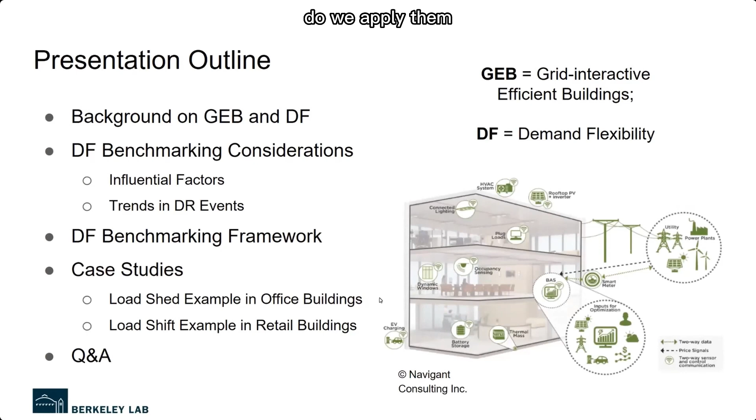So what I'm going to talk about today is to give you a background on grid interactive efficient buildings and demand flexibility in general. And then I'm going to show you this important benchmarking framework that we came up with. But also, as importantly, I want to share some of the thinking behind it, how we came up with this framework, why it looks the way it is, and then talk through a couple of very significant case studies with a large number of buildings. How do we apply them to answer research questions?

So buildings are getting increasingly smarter these days. They're no longer just the enclosure for human activities that consume energy to provide comfort. Certainly, we ask more of the buildings; these are the traits of modern grid interactive efficient buildings. We've been working on efficiency for decades by now, and they're connected with a lot of devices within the buildings, the office equipment or consumer electronics. And if we're not careful, these devices can consume a lot of energy. So energy consumption in buildings could be on the rise if we're not managing carefully.

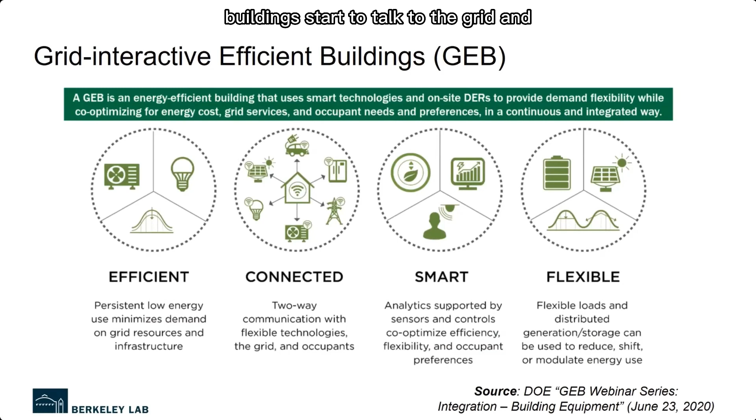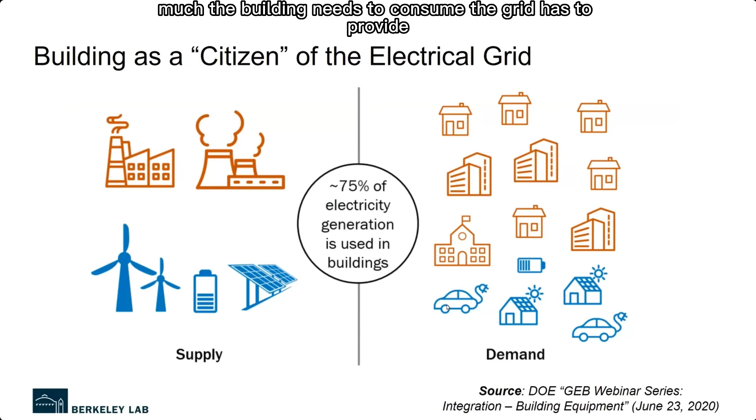And they're also connected not only with these devices within the building, but also with the grid and a lot of distributed energy resources, or DERs, connected to the buildings: the solar PVs, the batteries, the EV chargers, etc. So yeah, buildings start to talk to the grid. And let's talk about the relationship between building and the grid. So like I said, historically, the building only takes power from the electrical grid, and however much the building needs to consume, the grid has to provide, and of course the building owners have to pay for it.

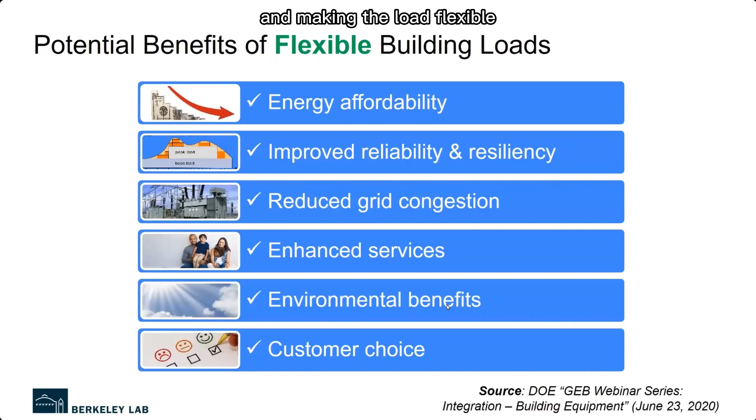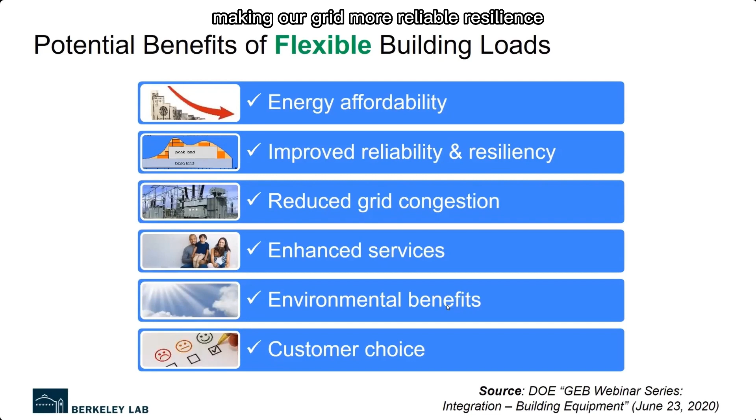But with climate change, there's an urgent need to utilize more renewable energy, and it's not available all the time. Wind does not always blow, and the sun does not always shine. So this relationship is changing, and the grid starts to ask buildings to use energy when clean energy is actually available. And this is driving the building's energy use to not only be efficient, but also flexible in when they use it. And that's what calls for the buildings to be a good citizen on our modern grid. So this is why we're talking about demand flexibility and making the load flexible. The buildings have a role in making energy more affordable, making our grid more reliable, resilient, reducing emissions, and so on.

So when we talk about demand flexibility, what is it? According to the Department of Energy GEB initiative, it is the ability of DERs to adjust buildings' load profile across different time scales. And this is essentially the same as what people call energy flexibility or load flexibility. Talking about time scale, starting with the fast services, which we call modulate. Buildings can provide this type of service, and studies or demonstrations have shown it's definitely doable. However, it's not the focus of our study or the GEB initiative for DOE in general, because this type of service has been pretty well covered by batteries and other inverter-enabled devices.

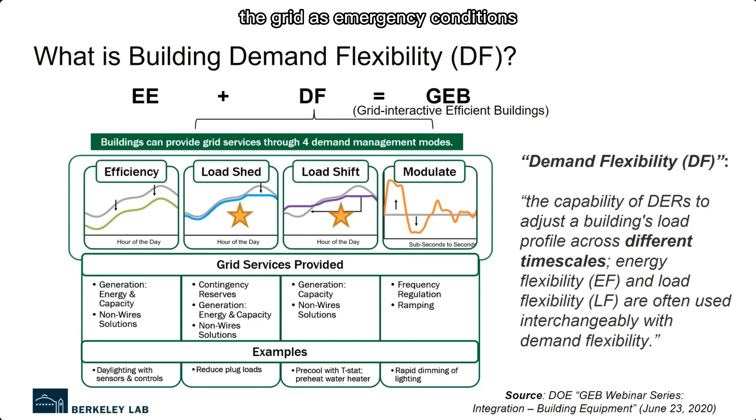So really, as a citizen on the grid, the grid is really looking to the buildings to provide load shed and load shift types of services. This is because when we talk about decarbonization, which is a really big strategy globally to battle climate change, we need to move energy use to those times when renewable energy is abundant on the grid. So that's a really important strategy. And then for load shed, there are times the grid has emergency conditions, whether that's a peak load condition or not the peak, but some contingency situation that really calls for load to shed to avoid massive blackouts. So those are the two types of demand flexibility that we're going to focus on in this study.

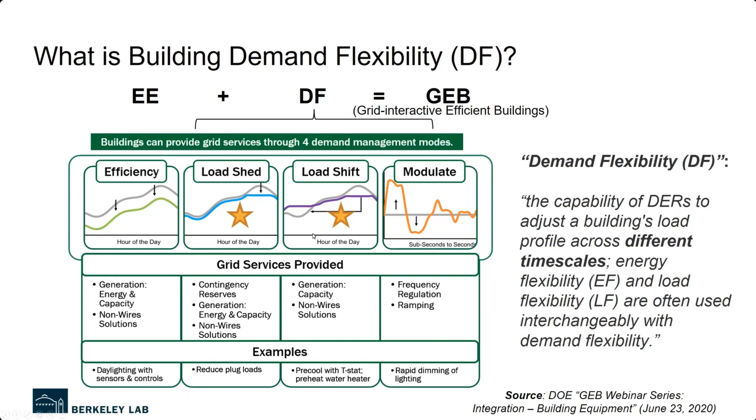And as part of this study, there's a major effort around simulation. So very large scale simulation work has been done. There are some large numbers pointing to the potential of GEBs, and certainly demand flexibility is an important part of it.

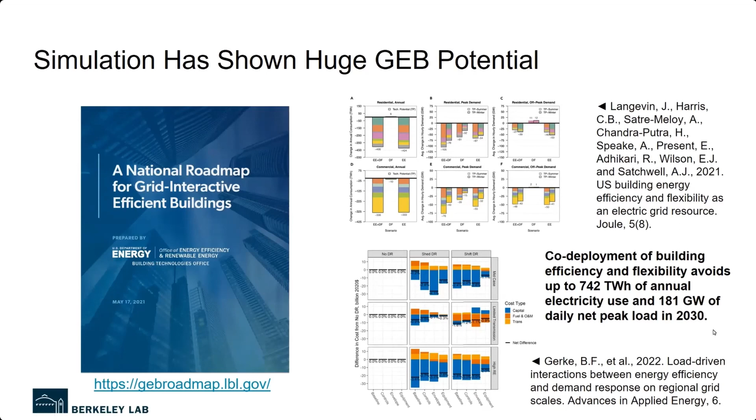So we just touched on simulation. I want to back out a little bit and talk about, when we talk about demand flexibility, there are three really important areas that we need to understand. When we measure demand flexibility in metrics, what's the magnitude of demand flexibility? What is the variation of it, or the range of it? And then what are the influential factors? So we're going to talk about all of them today.

And in this project, we have used three tools within the researcher's toolbox to understand demand flexibility: simulation, lab testing, and analysis of field data. We have done work in all three areas, but today we're going to mostly focus on the field data part.

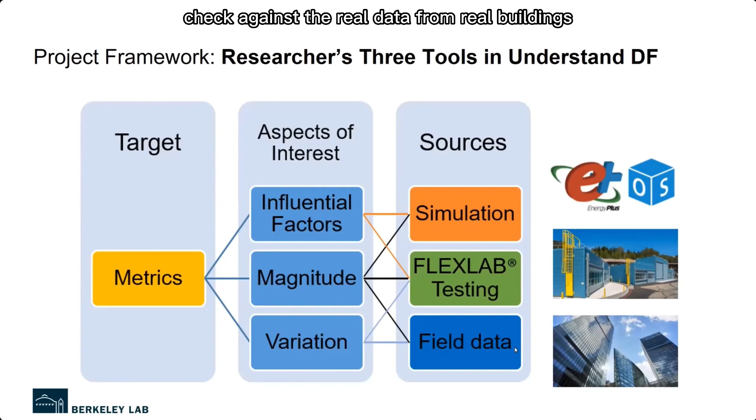So like I said, there has been some really impressive work done on the simulation front, but we're still trying to understand what might be the limitations to simulation, because we also have to really check against the real data from real buildings before we make important decisions for our grid and for our society. So that's why we're going to talk about looking at data from real buildings.

So what do we really need to learn from the field performance in buildings? Ultimately, the research work we do is going to inform policy making and investments. And that means there will be real consequences of such decisions. And that's why our policymakers and our grid planners and grid operators are often very nervous about making decisions solely based on simulation results. They want to see real performance in the field to prove demand flexibility as a resource for the grid as predicted in these studies.

So that's why we need to compare performance of many real buildings, extract knowledge from that, understand what drives performance in the field and in what way, and compare it with what we learned in simulation. So that's where the conversation about benchmarking demand flexibility comes in. And talking about benchmarking, let's start with a familiar place.

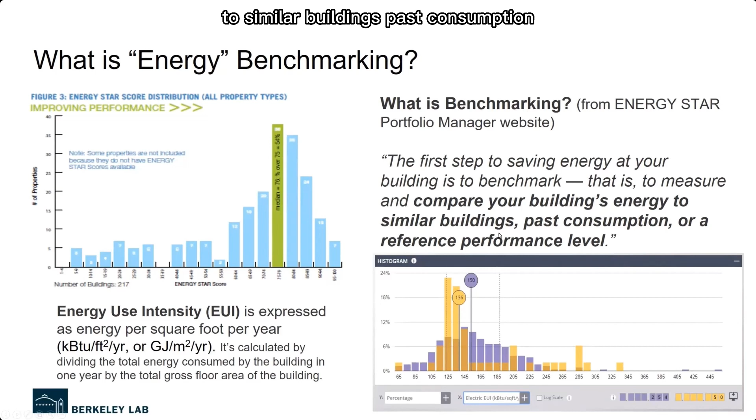So I trust all of you are familiar with energy benchmarking, and the energy use intensity, or EUI, is sort of the backbone metric behind that. And so what is benchmarking? Energy Star Portfolio Manager is one of the most popular tools for that. It talks about comparing your building's energy to similar buildings, past consumption, or a reference performance level. That is very similar to how we define demand flexibility benchmarking in the paper. We are also comparing the performance of demand flexibility among a group of buildings.

So some similarities with EUI benchmarking: we need one or more metrics. We need a peer group of buildings, and hopefully it's more granular than comparing with all of the office buildings out there, for example. We're hoping to compare with buildings of similar size, maybe in the same climates, similar vintage, or maybe even similar HVAC equipment, operating hours, and so on and so forth.

You know, when I started my profession, I think granular data like that was not really available. So it really has grown over time. We expect to see a similar journey for demand flexibility benchmarking. The data set will grow over time. And also, for each building, the performance is not a set value. It can change. It can degrade if we don't take care of it. But if we retrofit, it will hopefully improve over time.

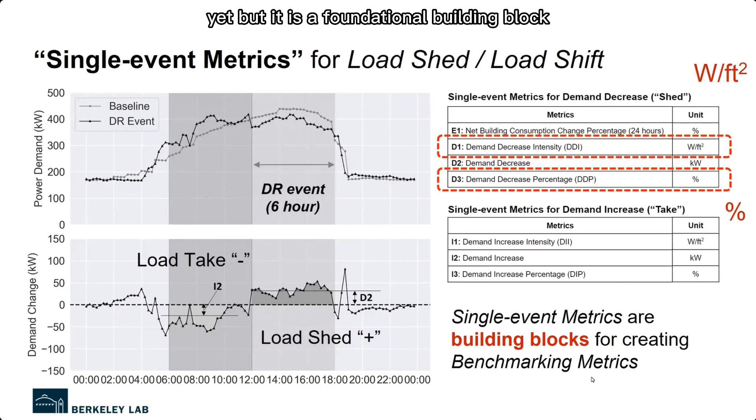And then the other important metric is what we call demand decrease percentage. It basically takes the average load shed over this period and divides it by the average baseline load of this period to get a percentage. So it is important to understand that the reason we call these single event metrics is because the metric only measures a single event, and we can't use it for benchmarking yet, but it is a foundational building block. So we'll show you the benchmarking metrics next.

So these are the single event metrics we just talked about, and you will see some connection between the demand decrease intensity, DDI, or the percentage, DDP. They are connected to calculating what we call the benchmark metrics. And among those, the benchmark DDI and benchmark DDP are among the most important metrics in this study. So I'll show you that through an example. We'll come back to this framework to explain the other parts.

So here's an example. In this paper, we presented two case studies. This is one of them, for office buildings in California. These buildings reset their thermostat set point up during the DR event by a couple of degrees to reduce the HVAC load. And then about half of these buildings have also done pre-cooling.

So the load shape for the load shift that we just saw earlier was selected from one of the buildings and one of the events. And then the other half of the buildings only did the HVAC load shed during the event. They did not do pre-cooling.

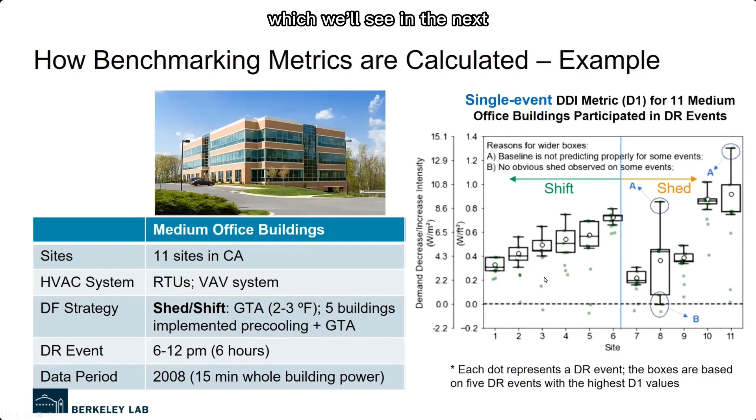So this is the same figure we just saw, and this was the example building we're talking about. It has 5. So for this building, the average of those 5 highest values was 0.49 watt per square foot, and it looks like it's roughly 5 watt per square meter.

And then there's another building, which, as we can see, has a larger spread of those 5 values, actually spread pretty wide, from 0 to 0.8 watt per square foot. So average to be 0.36. So as we can see, using this metric alone does not do a very good job of telling the story of that widespread performance.

And so that's the reason we also present this metric of benchmark DDSD. It looks at the standard deviation. So as you will see, for this building, this metric is much higher compared to other buildings. And of course, this building also has a relatively higher spread.

So in general, we want to see consistency in building performance. That makes the performance generally higher and also more predictable. And that's a really nice thing for either the building owner, the operator, or the grid. And there are a lot of interesting stories that we can see from this set of metrics.

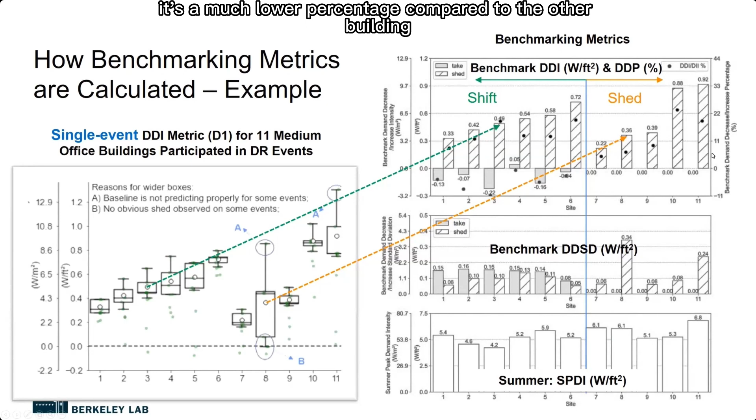And talking about the percentage, for this building example that we see, it is roughly 0.36 watt per square foot shed. And this building had a higher peak demand intensity, 6.1. So overall, looking at the percentage of the load shed for this building, it is roughly 6%. It's a much lower percentage compared to the other building we just saw.

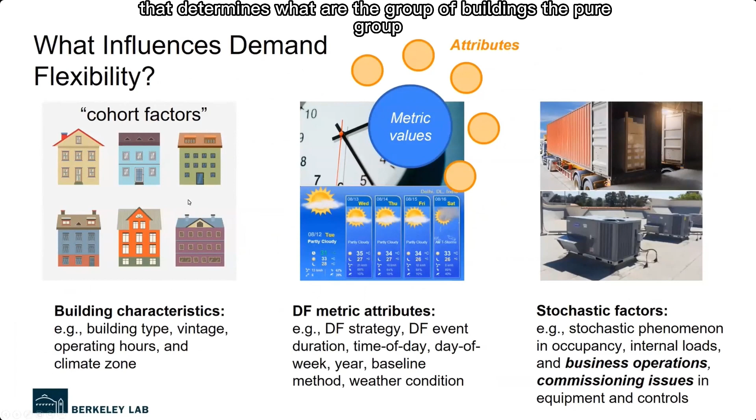So I think it's important to acknowledge that demand flexibility is subject to many, many factors. So there's certainly what type of building, how old it is, when it operates, what climate it's in, all that. And what we call these cohort factors in the framework we'll revisit in a second, that determines the group of buildings, the peer group, that we want to place a building within for apples-to-apples comparison.

And then there's a category of factors that will actually change from one event to another. A building may deploy different strategies in different events. The events may be of different duration, may happen at different times of the day, week and year, and so forth. The baseline method we will talk about is really important, and also what weather conditions. So these factors, we grouped them and treated them as attributes to the metric values that we show.

So it is a really important concept within this framework that we present these attributes that define under what conditions a metric was measured. Otherwise, presenting the metric value alone would not be super meaningful. And then on top of all this, there are also some stochastic factors. So these are the kinds of things that are kind of random. So we don't really capture them within the framework. They simply show up in the metric values.

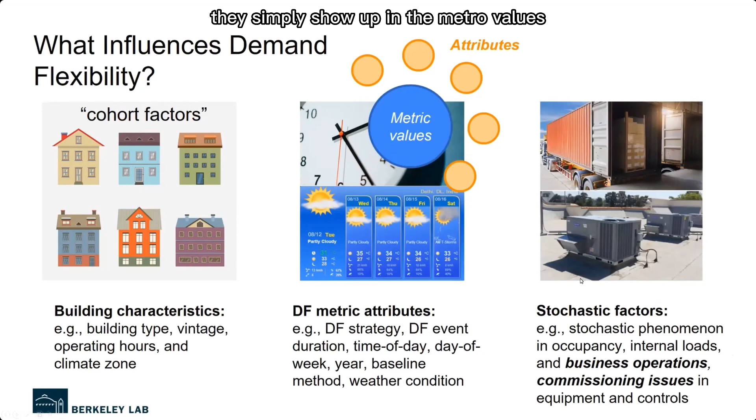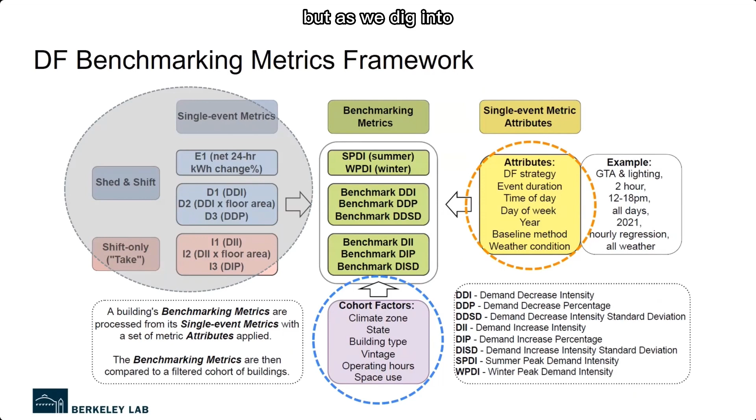So here's the framework again. And I think it's important to mention that when we started this framework, or when we started looking at demand flexibility metrics a few years ago, we only had this part. The other part of the framework did not exist at all. We were thinking that we could have some simple metrics to measure demand flexibility, and it did work with simulation. But as we dug into the data from real buildings, we came to realize that it would not work for real buildings. And I'll show you examples of why.

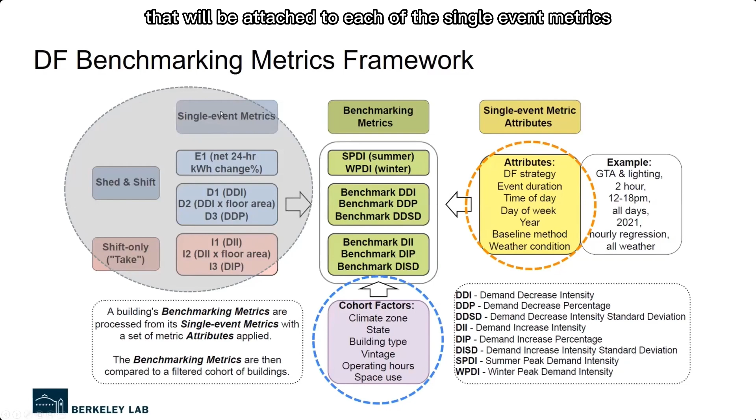So as we just talked about, these cohort factors are relatively static, and once we have all the metrics we need, we use them to decide what group of buildings we would put together for comparison. And then these are what we call single event metric attributes. What are the attributes that will be attached to each of the single event metrics? We'll show you 3 examples.

So this is the reality with real buildings. We had this very impressive set of retail buildings, over 100 of them, spread across the United States. And we looked at the DR events that they participated in over the years, and the timing of those events. We realized that buildings located in different states tend to participate in events that are either longer or shorter, or they may also happen at different times of the day, different times of the year.

So this means that if we use a fixed metric definition, however long a duration we use, there will be a lot of buildings we would not be able to compare with other buildings just because they have never participated in a 4-hour event or a 2-hour event, whatever duration we choose, if we used a fixed metric.

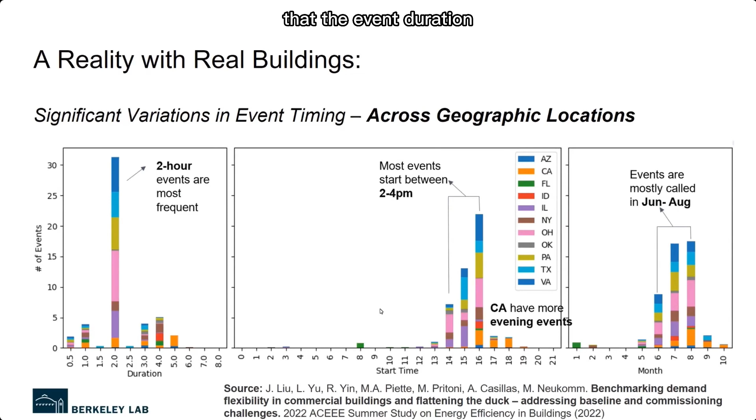Or if we didn't pay attention to that and simply threw buildings together for comparison, then we would not know what we are actually comparing. It would not be an apples to apples comparison, because later in the example, we will show you that the event duration can sometimes have a very significant influence on the metric value itself.

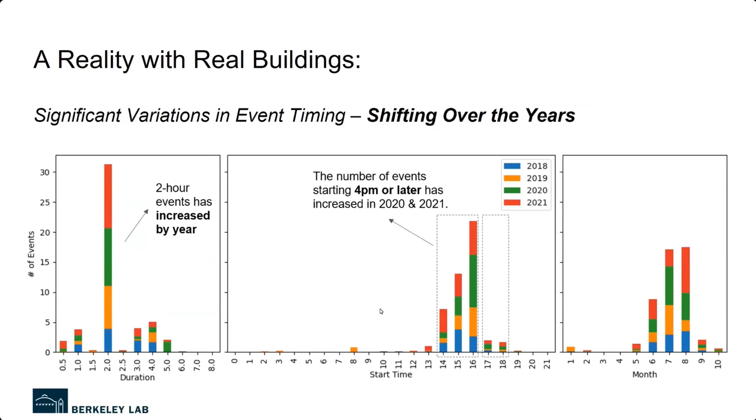So very similarly with this DR event data set, we also find that not only do they vary by geographic area, but they also evolve over time for any given region, because the needs of the grid keep changing as we add renewables, EVs, and all the other things we're doing. So that all says that we need a framework that is open and flexible enough to accommodate the changing needs and the varying needs across areas on the grid that call for buildings' demand flexibility.

So we have talked about this concept already, that we really have to present the metric values along with all the conditional parameters that define under what condition the metric was measured. So we'll use the example to show you that. The idea is that we would fix most of these attribute values and only vary one or maybe two at a time in order to see how those one or two factors or attributes influence the metric value.

Talking about zero-dimensional benchmarking, the EUI energy benchmarking example is essentially a form of zero-dimensional benchmarking. All of the buildings are simply using one metric by which they're compared among each other. And so we will use the retail buildings to show you examples of one-dimensional and two-dimensional benchmarking. It's a very unique approach in our framework.

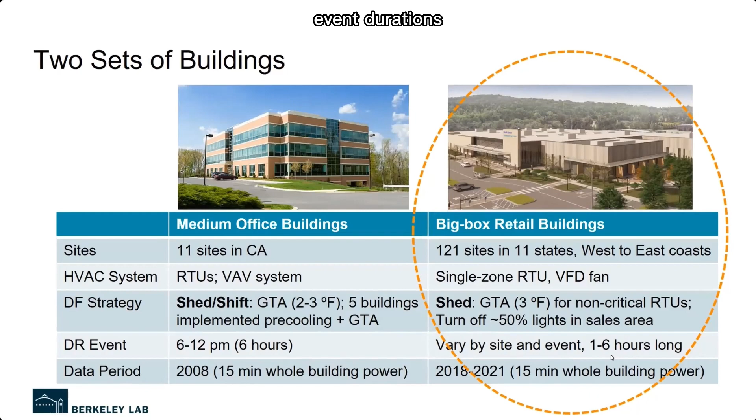So whenever we see 0 or negative values in load shed, that generally is an indication of either the building didn't shed load, or they could have opted out, or it could have been a baseline issue, which we'll touch on just a little bit later. Or it can be a combination of both.

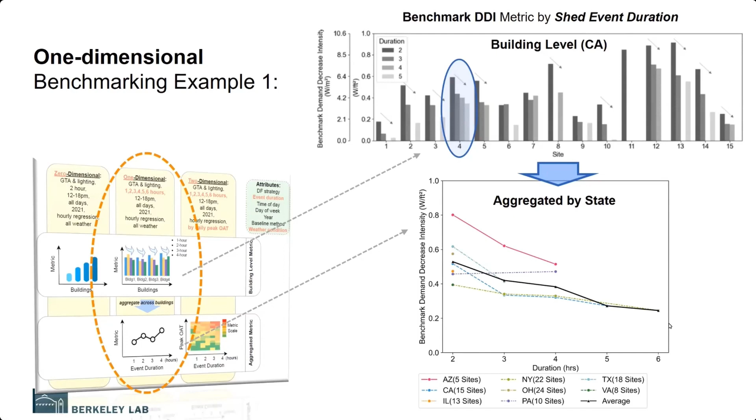So this is why we realized that we need a more open and more thoughtful framework for benchmarking, because we really cannot put the metric from a building that have done a bunch of short events with another building that have participated only in longer events. We just can't compare them that way. So I hope that helps illustrate why the framework is the way that you saw.

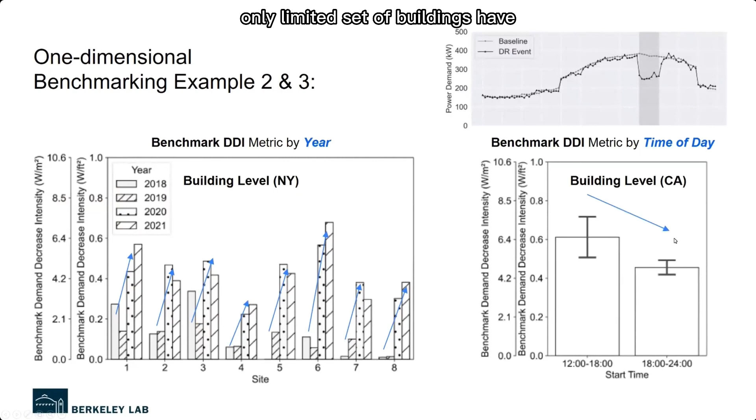And also there's only a limited set of buildings have participated in events that actually happened in the evening time frame. So it is a lower shed performance compared to those events that happen during the afternoon. And that's understandable because the building load is declining in the evening. So there's less to shed to begin with.

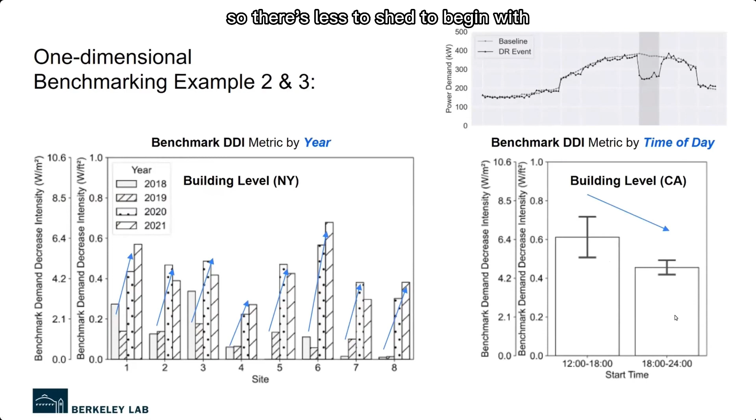And then we also take a look at one example for two-dimensional benchmarking. So this is more sophisticated and generally requires a larger number of data samples in order to make meaningful results. So we're lucky to be able to pull together one example as such, where we not only vary the event duration, but we also add a weather parameter on top of it. And we selected the daily peak temperature for the event day.

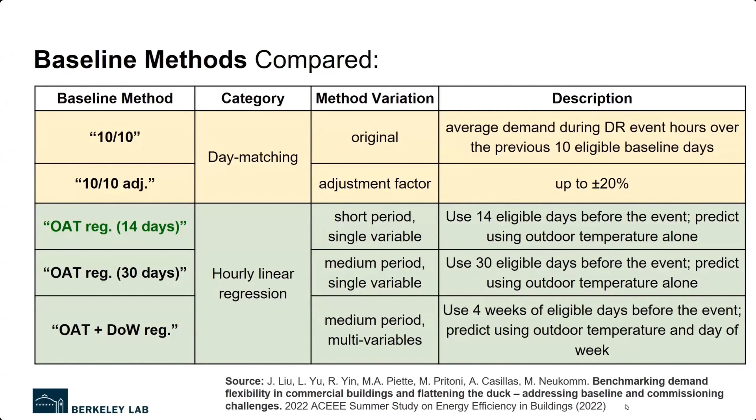So let's take a really quick look at the baseline method. We don't really have time to dig into it. If you're interested, we have published a paper with the ACEEE conference earlier this year talking specifically about baseline methods for the case studies that we have done. So we looked at several different baseline methodologies and compared them. And here I simply want to mention two things.

Well, we have to be very careful about the baseline method. This is something different for real building performance versus simulation. So if we're not careful, if we don't have a solid baseline method, then the metrics values that we use for benchmarking can be very misleading, because this is unlike energy efficiency. Baseline for demand flexibility, if we're not careful, it's very easy to have a pretty significant error.

And the other thing I want to mention is when we look at baseline, not only do we need to look at the error metrics in measuring how accurate each baseline methodology is, we also really need to pay attention to looking at some actual load shapes for the building, both for the non-event days and the event days, to visually verify with a decent amount of sample that what the error metrics tell you is actually what's going on with the building daily load profile.

And then we also want to acknowledge that many buildings today have DERs, on-site generation, batteries, EV charging, etc. This framework is still applicable to buildings like these. And the trick is that we will need to get some meter data for those DERs and then do addition or subtraction depending on what it is, on top of the net load that we measure with the building meter, before we apply the metrics.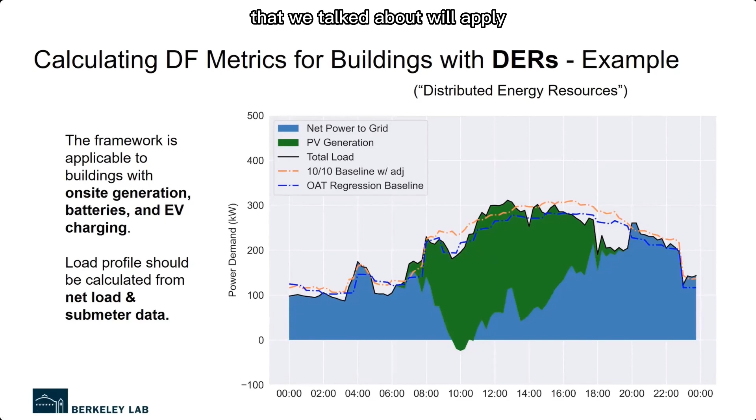So now I want to start talking about the application. So we talked about this framework. What would we use it for, and who should care about it? So let's start talking about some fundamental benchmarking objectives, and that's regardless of whether you're using it for academic purpose or business purpose. So there's three things that we can do, or three areas where benchmarking could be valuable.

First of all, we can monitor the performance over time. So similar to energy efficiency, if we don't pay attention, performance tends to degrade over time. So this will be a tool to monitor that. And also similar to energy efficiency, if we make retrofits and improvements, then we can verify it. We gave an example as such earlier where we saw the control upgrade did actually bump up the performance by a lot.

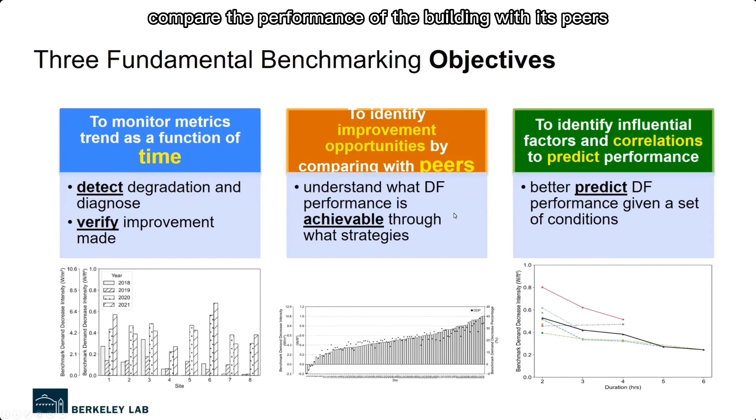And then secondly, this is also very similar to the EUI benchmarking we talked about, that it is really important to compare the performance of a building with its peers to understand what other buildings have done, where you stand, what is actually achievable, and get lessons learned or share best practices.

And then third, last but not least, this is really important and kind of unique for demand flexibility benchmarking: because of all these factors that are at play, it is important to understand any correlations, and ultimately, how can we better predict demand flexibility performance? So this is what the framework allows us to do. We talked about looking at things at building level and at aggregate level to understand parameters such as how long the event was, when the event happened, and many other factors. We can use the one-dimensional benchmarking as a tool to understand such influences.

So let's talk about the stakeholders who can use this for what and why would they care about it. So for the important players that are relevant to this, there are folks on the building owner side, and then there's the grid side, the utilities, and then in between sometimes there's aggregators. Let's talk about what they would each care about.

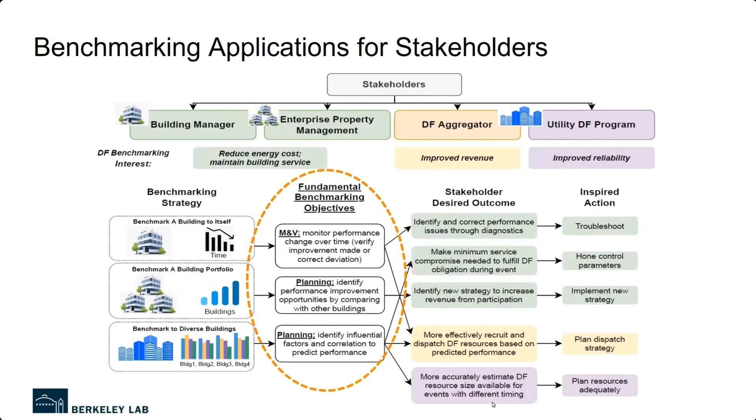So to summarize all the work we presented today, first of all, we proposed and introduced a novel demand flexibility benchmarking metrics framework. What's unique about it, it focused on load shed and load shift, and it has the challenges in real building performance in mind, as you can tell. And because we have not only the metrics, but also the conditional parameters, which we call attributes, that allows comparison across many different scenarios.

And as you can tell, we have been very focused on using a graphical approach to present the trends, how different factors come into play. And we think that's most useful for stakeholders. And also it allows us to not only look at things at the building level, but also aggregate to gain insights from potentially very large data sets.

So we presented the framework through two case studies, and we saw with the retail building example, it's over 100 buildings, which is probably the only data set like that I've seen in the literature, so it really fills a gap. And then for the office building group, it's not nearly as large. However, it's also quite unique because it's done load shifting, which is also rare to see in the literature today, with building thermal mass and pre-cooling.

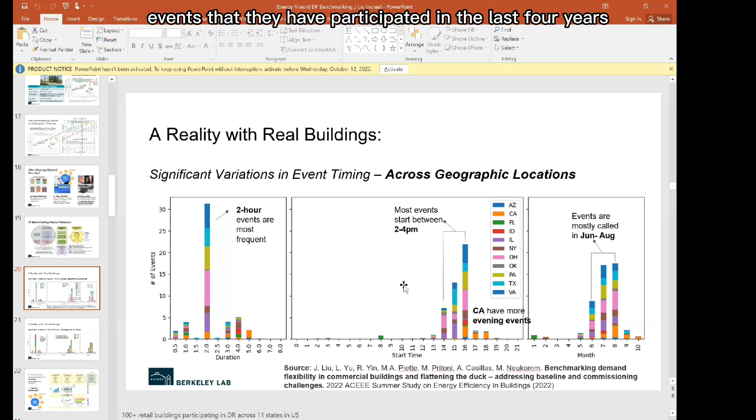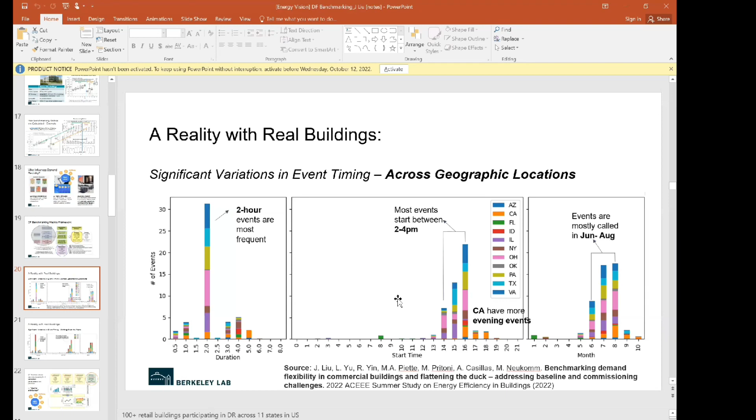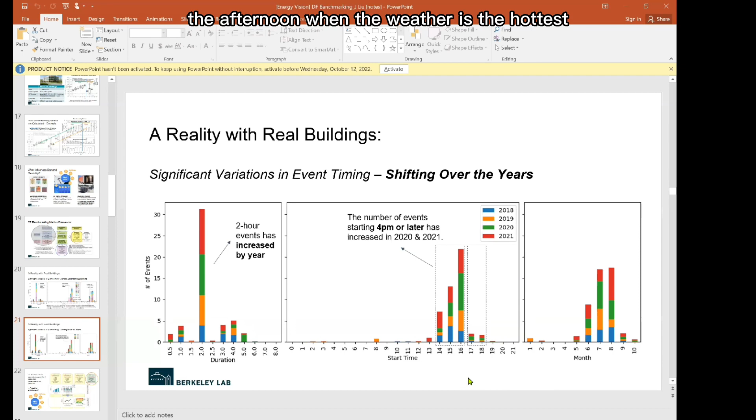And because they're located in many different states, it gives us a lens to see the timing. Like I said, those events used to be on the longer side, 4 hours plus minus, but now we're seeing events are getting shorter in many states. And also in some states, the timing of the events is moving from the afternoon when the weather is the hottest to later evening. And this is because,

in California, we have a pretty famous problem on the grid, which is called the duck curve. It doesn't happen on the hottest days in summer, rather it actually happens in transitional seasons, especially spring, when solar PV is generating a lot of energy. So you would see that on the grid, what we call the system load will have a pretty big dip in the middle of the day because of the solar PV. And then people come home, start to do their laundry or their dishes and watch TV and all that.

So the energy use peaks up in the evening somewhere between say 4 or 5 all the way through say 9 o'clock in the evening. So what we see is a really steep ramping up curve from the middle of the day to the evening, and it's so steep that the traditional generators have a hard time keeping up with that. So in California, we are probably among the first in the world that have to tackle this problem, but we're also seeing a very similar trend happening in other states,

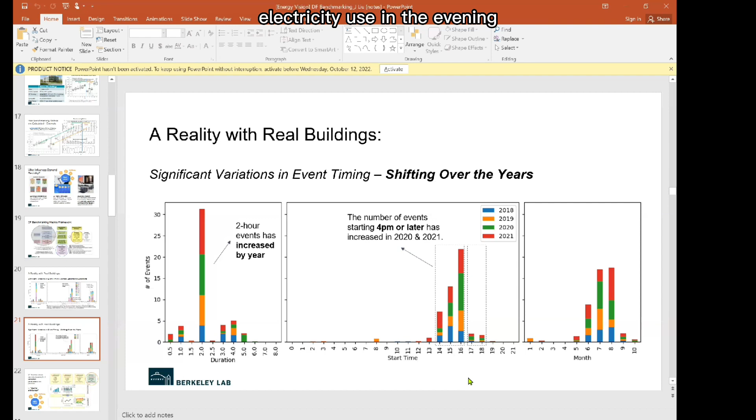because everybody tends to have higher electricity use in the evening, and the solar penetration is increasing in many states. So that curve, probably in a few years, won't be so unique to California anymore. So yeah, that's a big driver for the timing of the events you asked about. That's a very big part of the trend. Does that kind of help answer your question? Do you have any follow-up question on that?

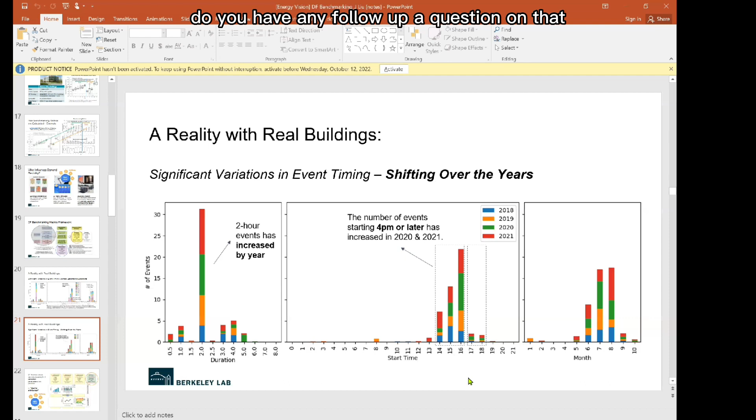Yes, thank you very much. I think it's very interesting. I got it. Of course. Yeah, that's a great question. Thank you for that.